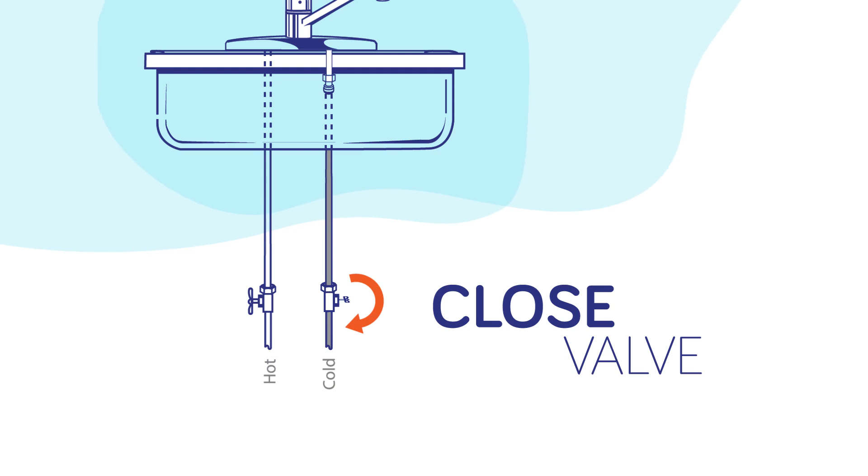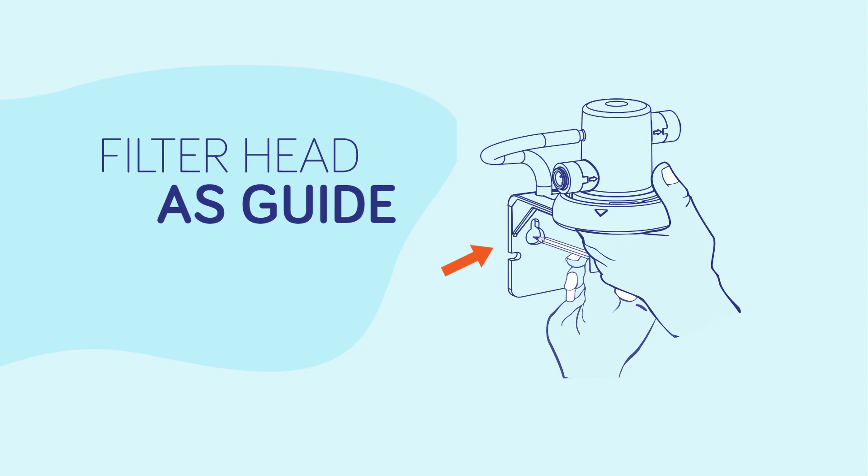Select and mark a location under the sink that allows access for filter change. Using the filter head assembly as a guide, fasten the filter head assembly to the wall with the system fasteners. Use of a drill may be required to start screw holes. Allow a minimum of 3-inch clearance from the bottom of the filter cartridge for ease of removal.

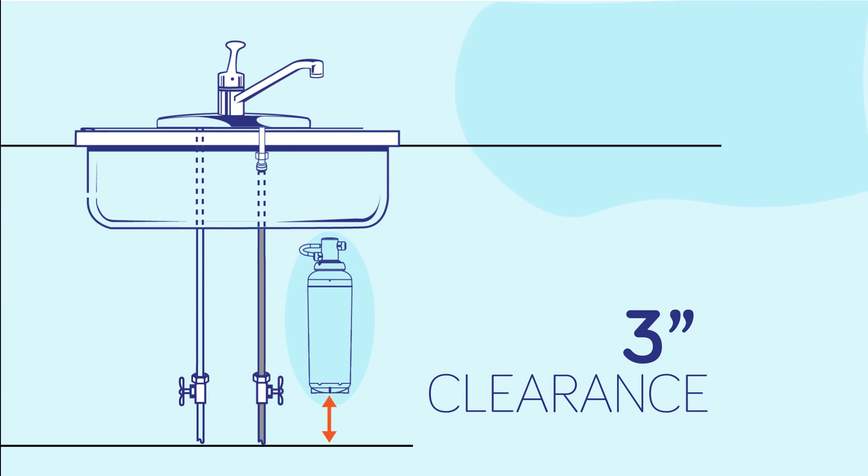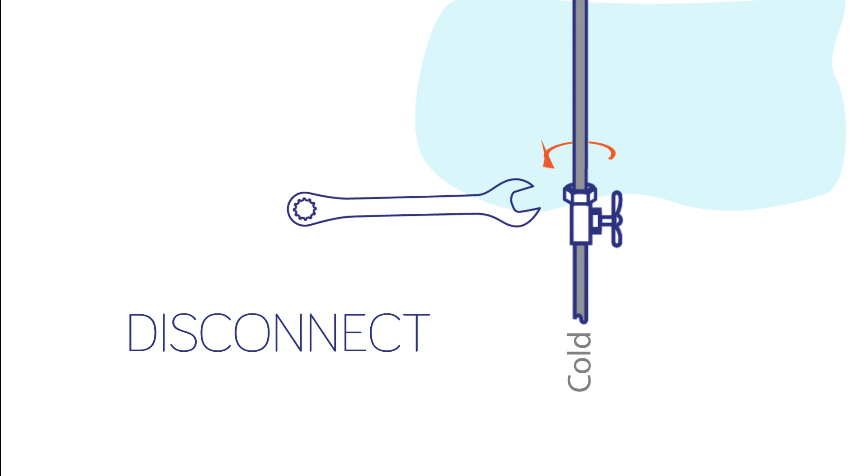Place a bucket or towel under the cold water supply valve. Disconnect the cold water from the supply valve. This riser leads to the faucet. Install the enclosed 3/8-inch female faucet adapter fitting to the faucet stem. This should be a snug fit.

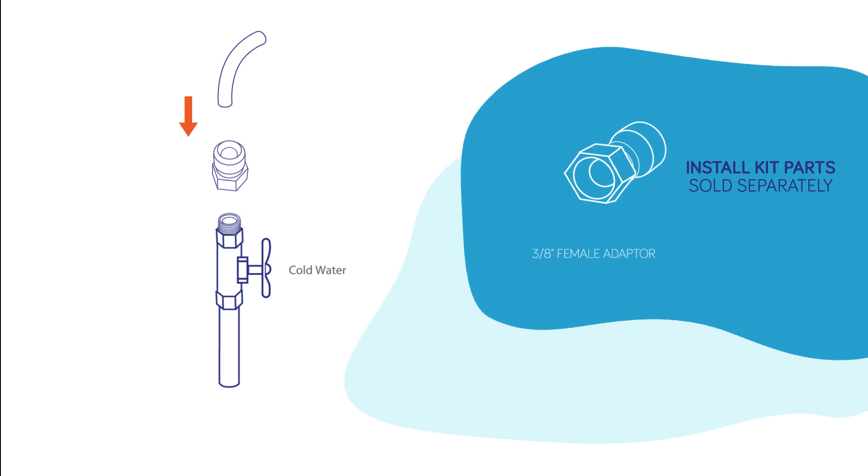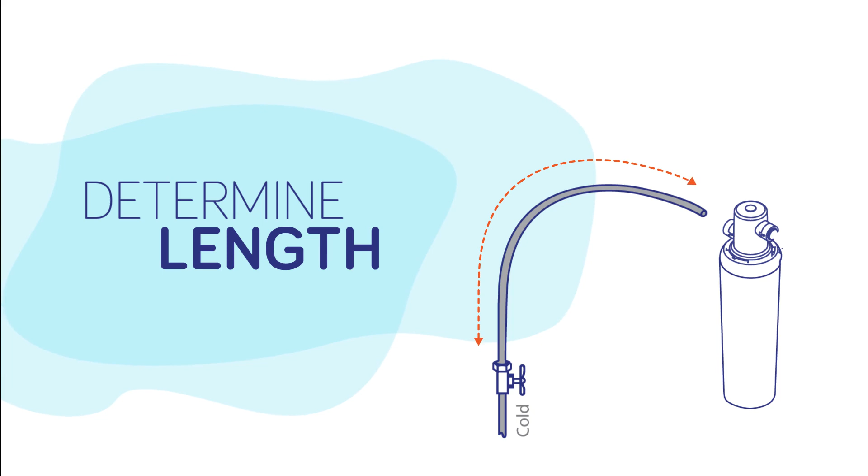Do not over-tighten fitting. Determine length of 3/8-inch poly tubing required from the faucet stem to inlet of the filter head by holding tubing in place, ensuring it is of appropriate length. Cut tubing straight with a razor knife.

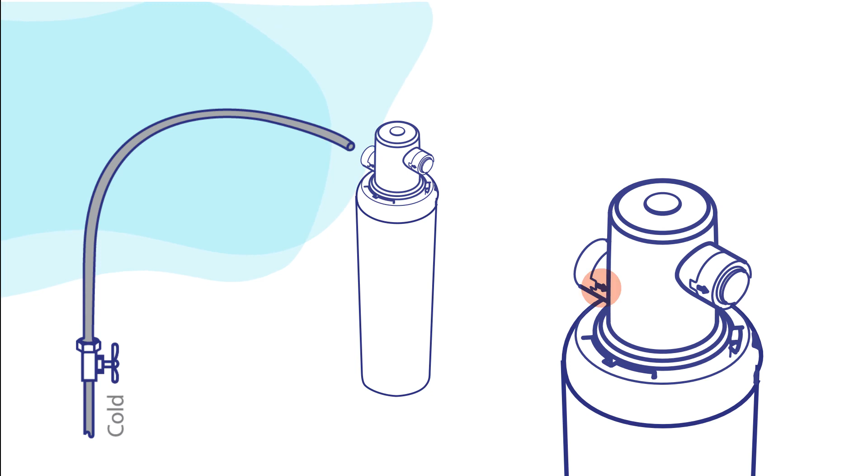Insert 3/8-inch tubing into faucet adapter fitting, then insert the other end to the inlet of the filter head. Note the water flow arrows on the filter head. Install the enclosed 3/8-inch male adapter fitting to the faucet line.

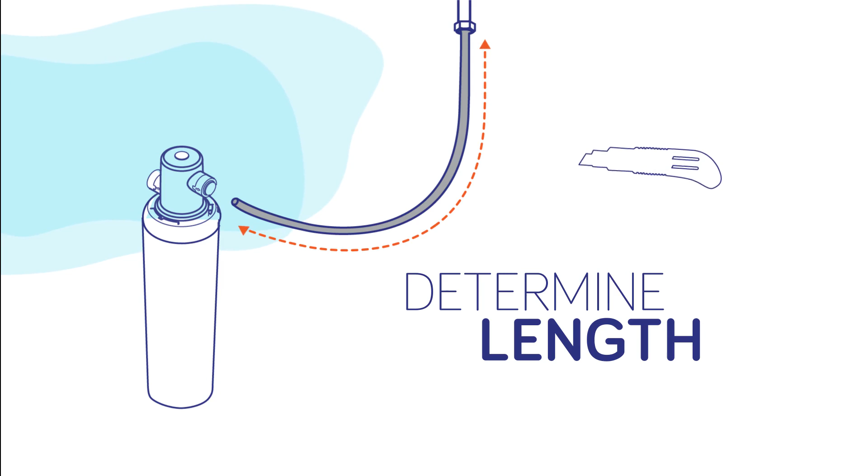Determine length of 3/8-inch tubing required from the filter head outlet to the faucet line by holding the tubing in place, ensuring it is of appropriate length. Do not kink tubing. Insert 3/8-inch poly line to the male adapter fitting and insert the other end of the poly line to the outlet of the filter head.

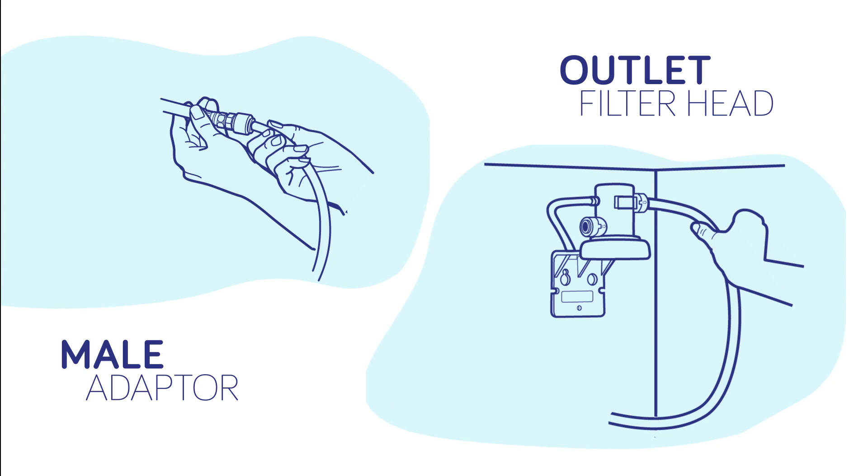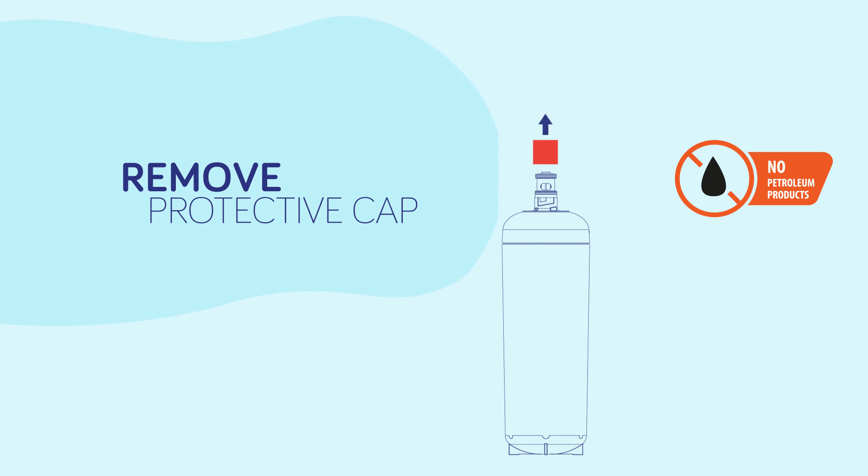Add the time strip to the filter, activate, and list the date installed on the label. Remove the sanitary protective red cap from the filter cartridge. Ensure both O-rings are present on the filter and are seated into grooves.

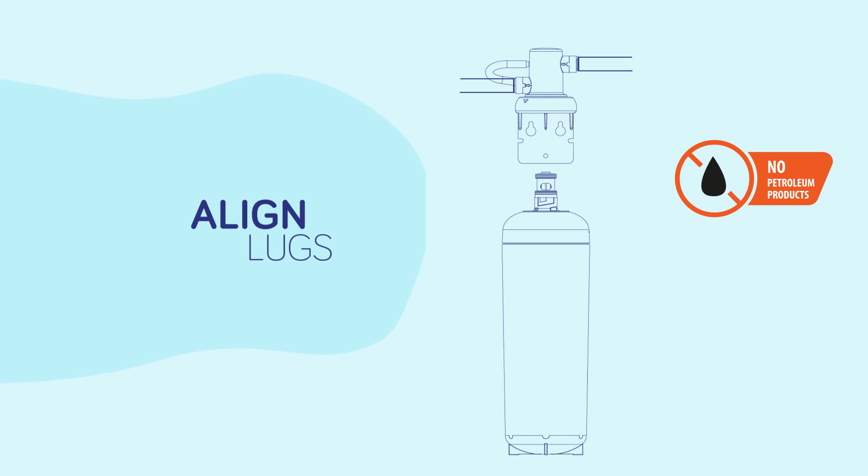Moisten O-rings with water. Align lugs of filter with head assembly and insert filter into head assembly. Turn the filter to the right, clockwise, until it stops, about 1/4 turn. The filter is now installed.

Turn on the cold water supply valve and open the faucet to flush air from the system. Run water for a minimum of 5 gallons, approximately 2 minutes, to flush the system and close the faucet. The system is now ready for use.

The system is now under pressure and can be inspected for leaks. Repair any leaks as needed before continuing. Please refer to the user guide for troubleshooting. For optimal results, replace the filter every 12 months by purchasing a new one on our website.

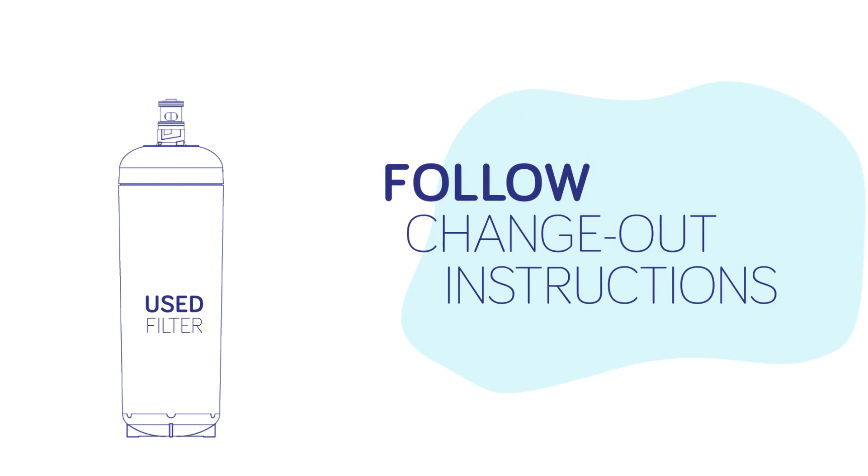To replace the filter: with our filter technology, there is no need to turn off the cold water valve. Just place a towel under the filter to collect any residual water during the replacement filter changeout. Grasp the filter and turn to the left until the filter comes to a complete stop. Water may leak momentarily from the vent tube.

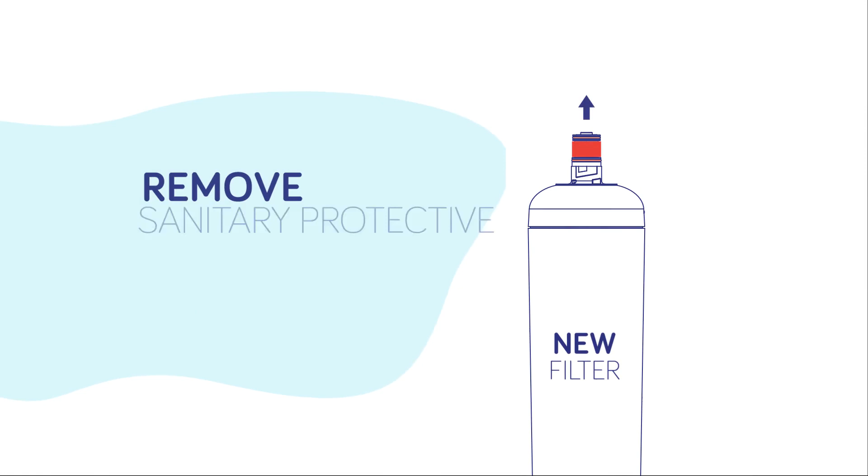Gently pull the filter downward to remove it. Follow the filter return instructions found inside the box. Add the time strip to the new filter and activate and list the date on the label. New filters can be purchased on our website. Remove sanitary protective cap from new replacement filter.

Ensure both O-rings are present on the replacement filter and are seated into grooves. Moisten O-rings with water. Do not use any petroleum products to lubricate the O-rings. Insert replacement filter into the filter head assembly. Turn the filter 1/4 turn to the right until it stops.

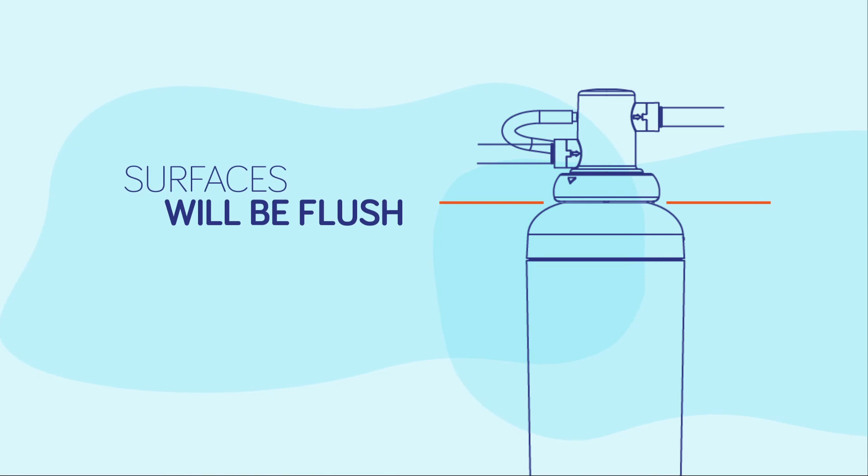When fully engaged, the top surface of the filter will be flush with the bottom of the filter head assembly. Open the faucet and run water for a minimum of 5 gallons, approximately 2 minutes. While the system is flushing, check for leaks. Repair any leaks as needed before continuing.

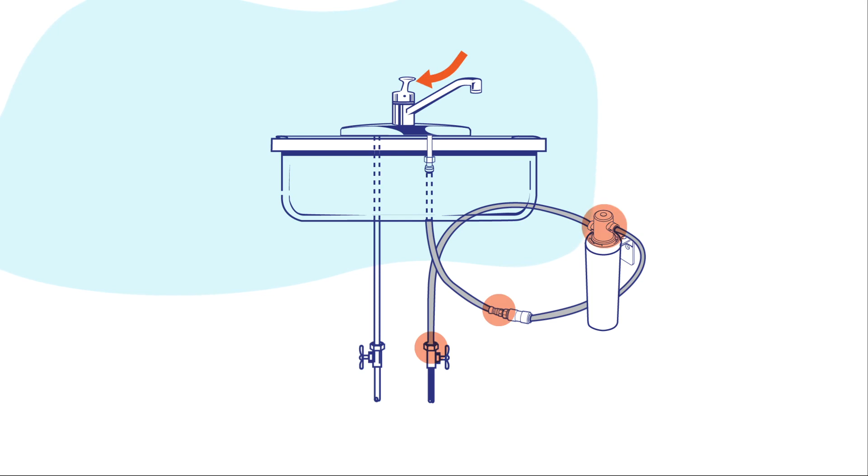Close filter system faucet. The system is now under pressure and can be inspected for leaks. Follow the filter flushing instructions and you're all set. Enjoy your water.